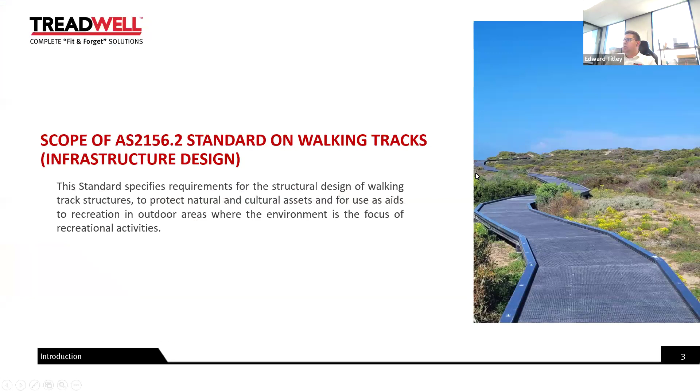Today we're looking at AS2156 Part 2. Last webinar we looked at Part 1, which is in relation to classification of walking tracks. Today we're looking at Part 2, which is in relation to structural design of walking track structures. Structures covered in AS2156 include boardwalks, pedestrian bridges, platforms, barriers, etc., that we typically find in the public space.

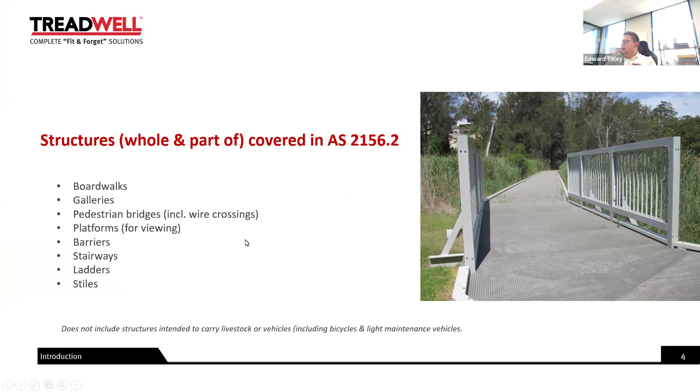Note that this doesn't include structures intended to carry livestock or vehicles, which would include bicycles and light maintenance vehicles. The objective of the standard is to provide designers and builders with design and construction requirements for non-habitable outdoor structures intended to protect the environment and be used as recreational facilities.

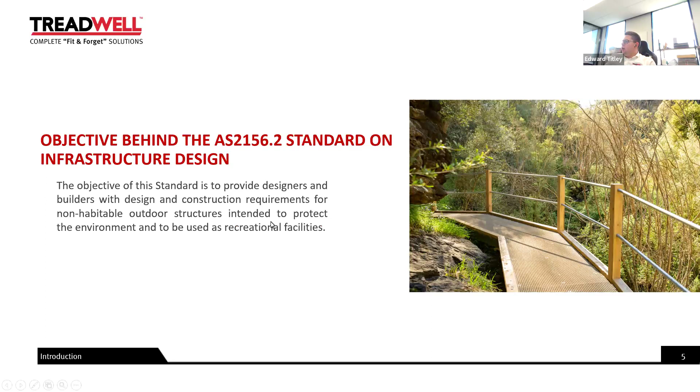Just before we go any further, a little bit of housekeeping, or basic notes: we're not Standards Australia. We didn't write the standard, so I'm not going to be able to read into it and explain the meaning behind a particular clause. All we can do is review what the standard says, and this is not exhaustive. We haven't got time in this session to cover everything in the standard, but we'll cover what we feel are the pertinent points. And lastly, standards are subject to interpretation.

I might interpret it differently to you, and that's the way it is with standards. Everything we discuss is general, and if you'd like to have a site-specific or project-specific discussion, we're happy to do so, separately or at another time to this.

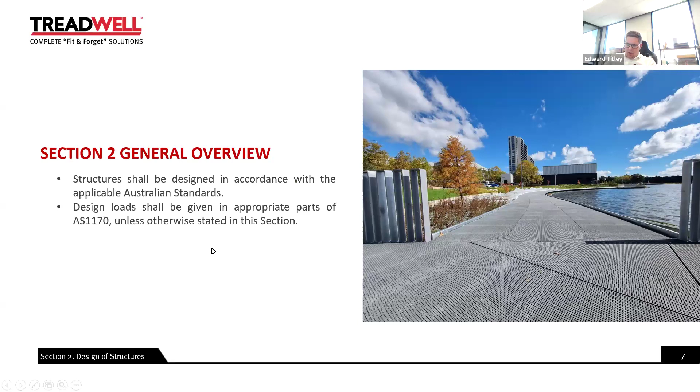So, a bit of a general overview to start with. Structures shall be designed in accordance with the applicable Australian standards, and design loads given in appropriate parts of AS 1170 should be used unless otherwise stated here. So that's the first thing to note — 1170 would apply unless this standard states something alternative.

Limit state design, serviceability limit state: the structure and its members shall satisfy the serviceability limit state requirements in AS 1170.

For track classes 4 and 5, set serviceability limits to ensure that deflections will not prove uncomfortable and the structure can absorb deflection without causing damage.

In relation to strength and stability limit states, likewise AS 1170.1, the structure and its members should be designed to support the combination of factored loads and forces from that standard, and also follow the live load combination factors in 1170.1 for strength and stability limit states when applicable.

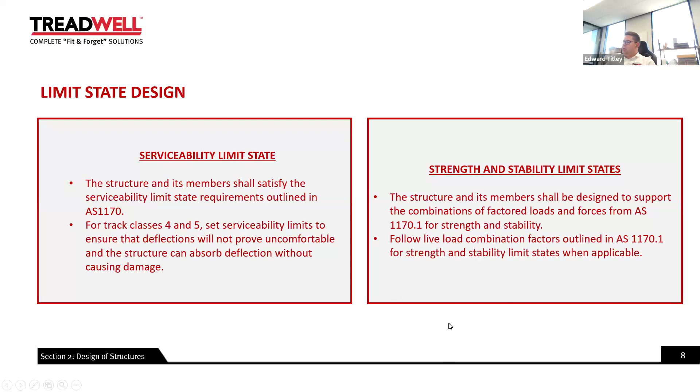As we discussed last webinar, several track classes are included in 2156. Today we're looking at the first five track classes, classes 1 to 5. From looking at the standards, we'd suggest that walking tracks, elevated structures, boardwalks, and those sort of things are not applicable to track classes other than 1 to 5.

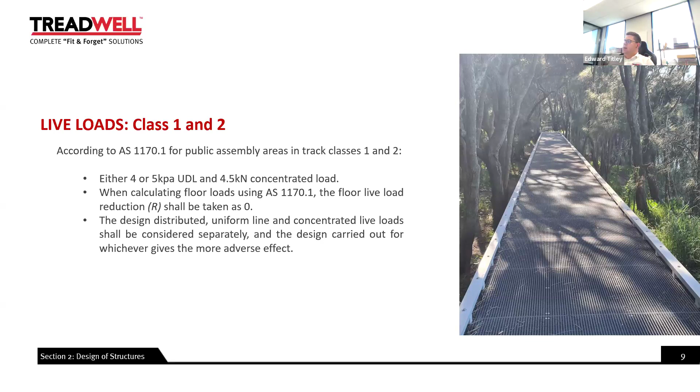So class 1 and 2 firstly. According to AS 1170.1, for public assembly areas is the loading that should be considered for track class 1 and 2. This depends on which part of 1170 you look at, and I'd strongly suggest this is considered in conjunction with 1170: 4 or 5 kPa UDL, so there are slightly different scenarios given, and a 4.5 kilonewton concentrated load. Also note, when calculating floor load using 1170.1, the floor live load reduction, given as R, shall be taken as 0. Lastly, the design distributed uniform line and concentrated live load shall be considered separately, and the design carried out for whichever gives the more adverse effect.

Now track classes 3 to 5 have slightly different requirements to class 1 and 2, and class 3 and 4 have different requirements to class 5. Firstly, 3 and 4: 4 kPa UDL loading for viewing platforms, and 3 kPa for what's considered an access way. Class 5: 3 kPa for viewing platforms, 2 kPa for access ways.

Also, a concentrated load of 1.4 kilonewtons applied over a 75 by 75 millimeter squared area at either known positions, where that loading would be applied in use or in practice, or if not known, then wherever it produces the most adverse effect. For wire crossings, the live load should be a line load of 1.1 kilonewtons per meter, and as per classes 1 and 2, the distributed uniform line and concentrated load shall be considered separately, with design carried out for whichever gives the most adverse effect.

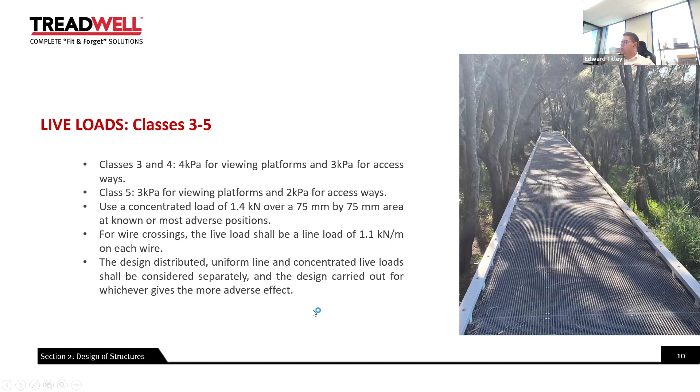Lateral loadings shall take into account the effects of wind as per 1170.2, earthquake as per 1170.4, and the movement of people. They may all be considered separately. For the movement of people, the lateral load should be taken as 250 newtons per square meter of the planned area of the structure.

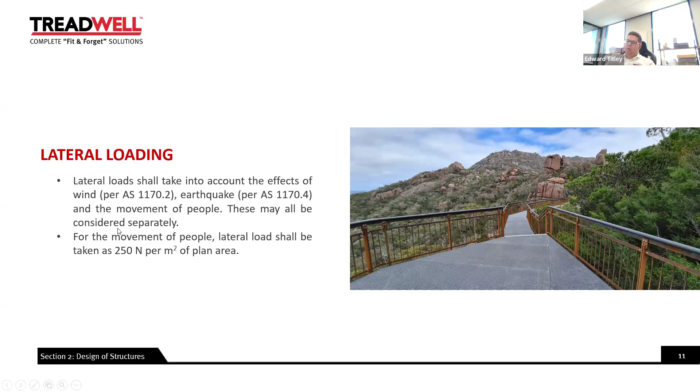Snow and ice load shall be in accordance with 1170.3 for the areas given in that standard, with allowance made for barriers and other built impediments. So the effect of snow and ice build up on wind loads also needs to be considered.

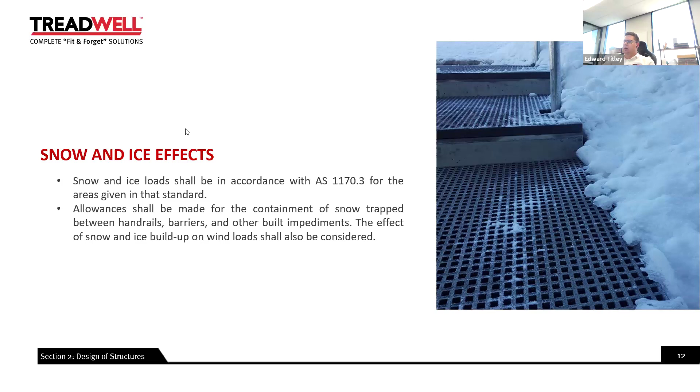For example, if we expect that in a balustrade or handrail system, ice would render that from an open infill to a solid infill with the build up of ice or snow, then we'd need to consider the wind load accordingly, as if that was a solid item rather than an open infill. Not sure if that makes sense, hopefully it does.

Design of supports: foundation design based on limit states approach. Use load combinations from 1170.1 for serviceability, strength, and stability. Short-term multiplier is 1. For design based on nominal loads, refer to the specified nominal loads, clauses 2.3, 2.4, and 2.5, which can be considered separately.

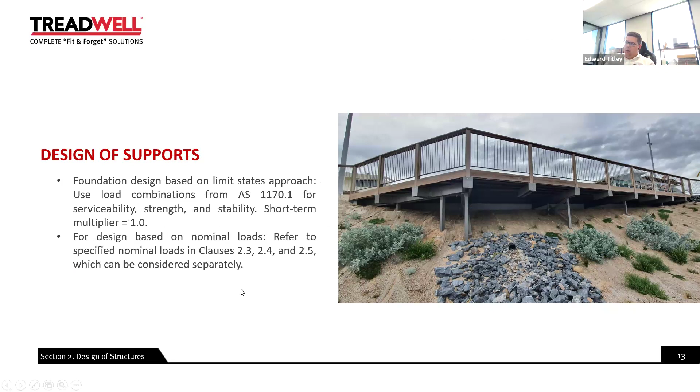Now, just on some barriers, and I'm conscious we're going quite quickly, unfortunately. That's kind of a necessary evil with the amount of stuff to cover here.

Live loads of barriers is specified in 1170.1 for track classifications 1 and 2, and other classifications would follow this table, given here on the right.

Loads of top rail and infill can be applied separately for barriers with infill material. So for platforms of class 3, 4, and 5: top rail horizontally 0.75 kilonewtons per meter, and likewise vertically; 1 kPa on the infill and half a kilonewton in any direction on the infill also. For access structures: 0.36 kilonewtons per meter horizontally and vertically, and 0.75 kPa horizontally and 0.25 kilonewtons in any direction on the infill.

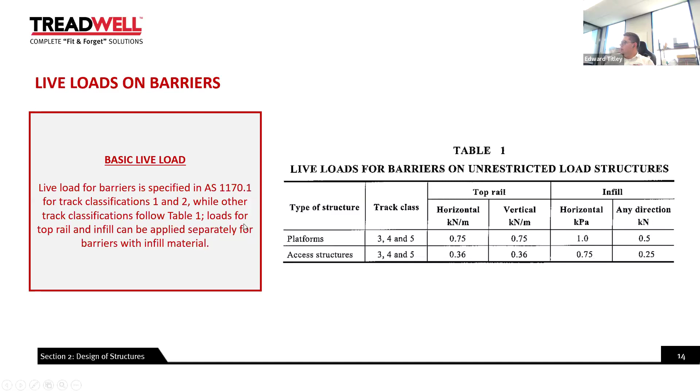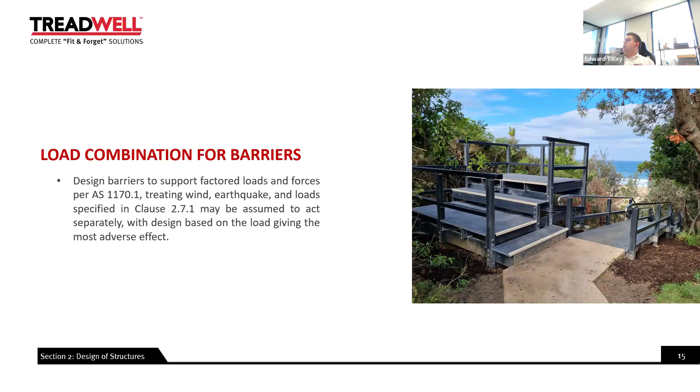Load combinations for barriers: design barriers to support factored loads and forces to 1170.1. Wind, earthquake, and load specified in clause 2.7.1 may be assumed to act separately, once again with the design based on the load giving the most adverse effect.

Nearly lastly, section 3, safety from falling. We haven't got enough time or room really in this presentation to review this section in full detail. I'd strongly suggest you have a look at the effective fall height calculations. This is something we often see catch people out, or overlook. It needs to be considered in the specific application or the environment in which the structure is to be installed.

So in the provision of barriers, effective fall heights are given here on the left. Track class 1, 2, 3, 4, and 5 is given across the top, and then various designs of barriers A, B, C, D, etc. are given.

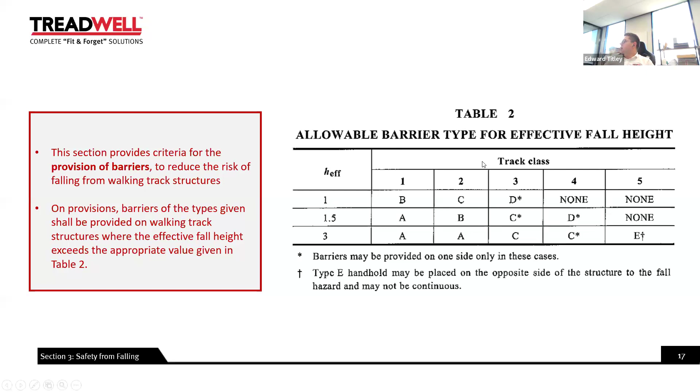There's also an assessment of the impact of the fall impact surface, which, depending on what it is, can be categorized according to several categories: benign, favorable, unfavorable, or hazardous. I won't read the table to you, I'm sure everyone's capable of reading it, but just something to be mindful of there. We need to consider, once again, the particular environment in which the structure is going to be installed, with a view to the full assessment of the fall surface.

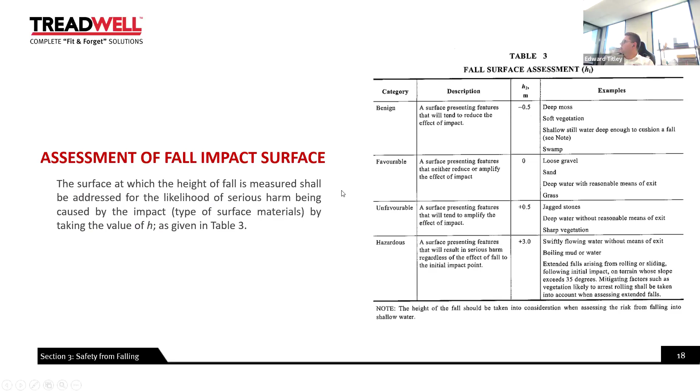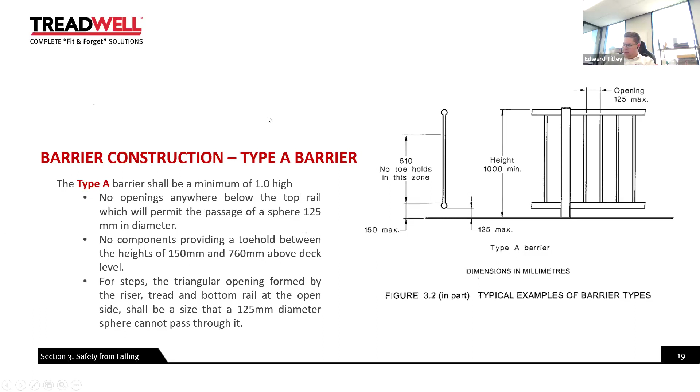Now, this is a type A barrier, minimum of 1 meter high. We can see some stipulations here around no components providing a toe hold between 150 mil and 760 mil above the deck level. In relation to steps, the triangular opening formed by the riser, tread, and bottom rail at the open side shall not allow the 125 mil sphere to pass through, and also the maximum opening in the type A barrier is 125 mil. If you're familiar with AS 1428.1, this may also look familiar to you.

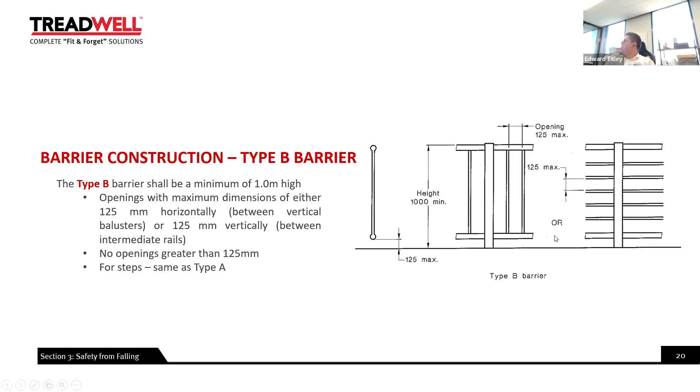Type B is similar, however you can see allowance is made here for horizontal balusters or infill, often a tension wire rope, but it could be a solid member. Same as type A for the steps, and once again no openings greater than 125 mil, so the 125 mil sphere doesn't pass through either horizontally between the vertical balusters or vertically between what we're calling intermediate rails here.

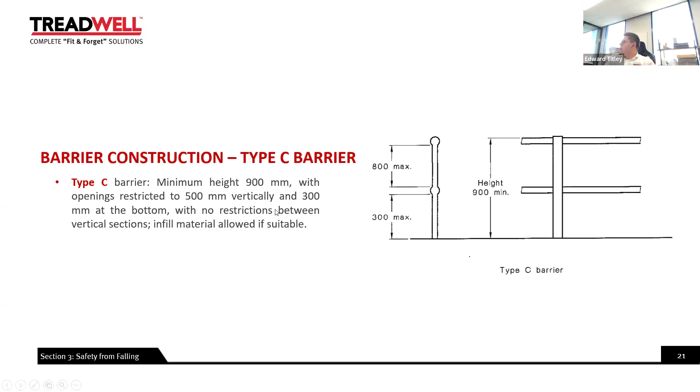Type C barrier is a much more simple handrail, a bit like a guardrail as per AS 1657. I should clarify the loading criteria is not the same, so please don't take that as me saying you can use AS 1657 guardrails in this application - that's not the case. That needs to be assessed on its merits, or a handrail system would need to be assessed on its merits. Once again, minimum height 900 mil, and we've got our openings restricted at 500 mil vertically, 300 mil at the bottom, with no restrictions between vertical sections, and infill material is allowed if suitable.

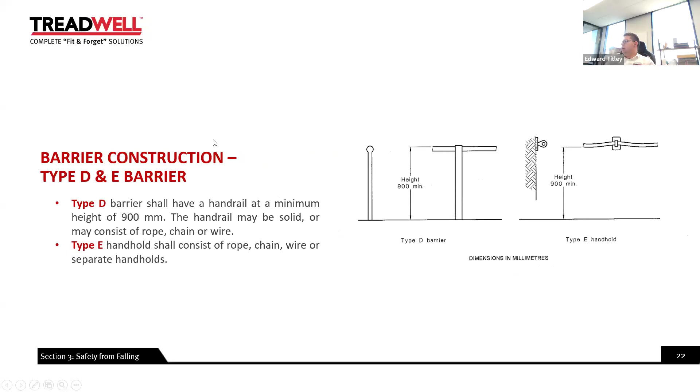And then a type D and E barrier: single handrail for a type D barrier, 900 mil height minimum, and type E as a handhold being rope, chain, wire, or separate handholds.

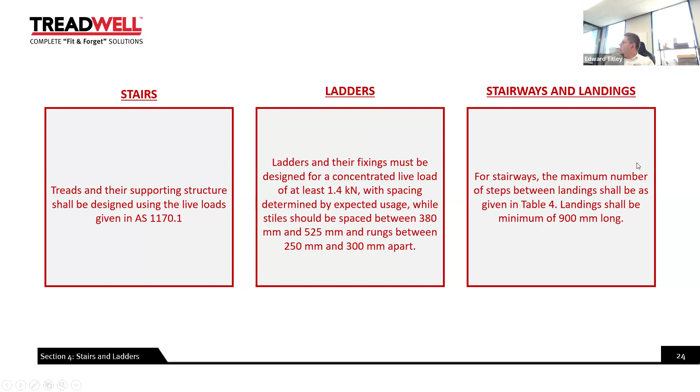Stiles should be between 380 and 525 mil, and rungs between 250 and 300 mil apart. And for stairways, the maximum number of steps between landings is as per table 4, with landings given as 900 mil long.

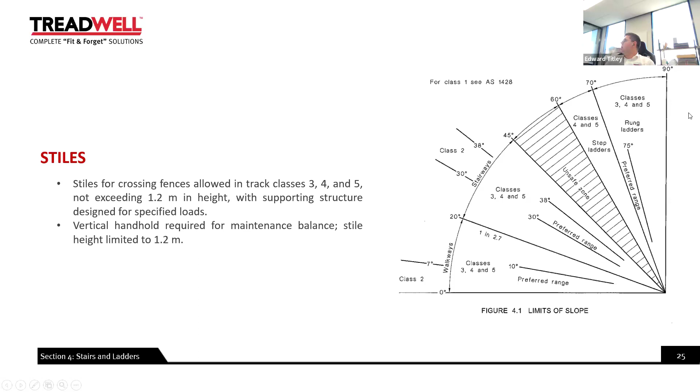Just a note here as far as the applicable classes: you can see class 2 below 7 degrees, and stairways 30 to 38 degrees for class 2, whereas for 3, 4, and 5, walkways and stairways go to 45 degrees. Step ladders refer to classes 4 and 5 only, and rung ladders, once again, classes 3, 4, and 5.